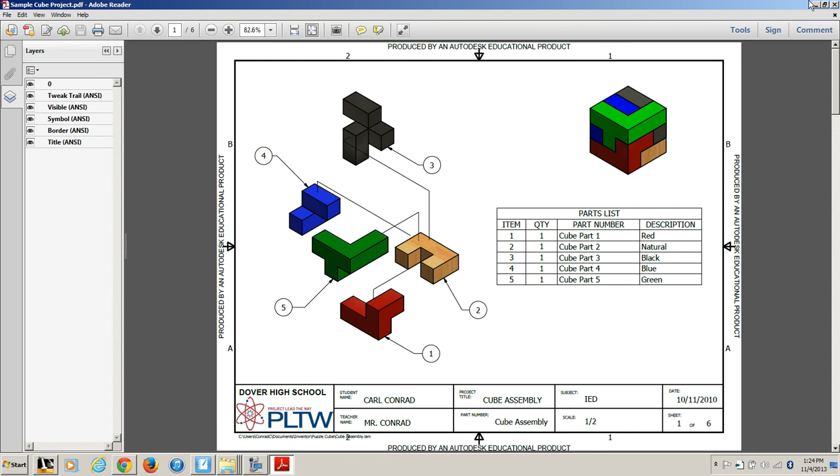In order to do that, we don't want 6 separate files for each drawing. If I click on my Place Views tab, there's an option up here. See, right over here we see sheet number 1. We want to not do different files but insert a new sheet. So I'll go ahead and put my dates in there. And your regular puzzle cube parts, they can all be 1-to-1 scale. Okay, so that's what we'll set up to do, is all 1-to-1.

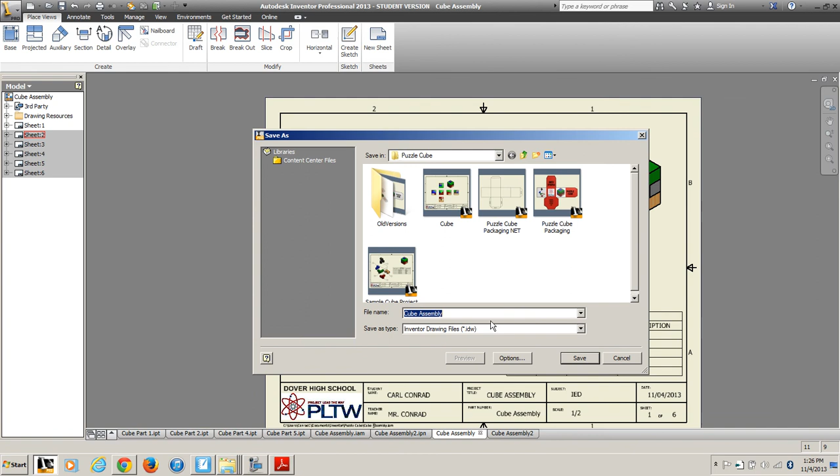And see, there's sheet 2, and we could just keep going. Go ahead and do all 6 sheets. Put the date in. 1-to-1 scale for all 6 sheets. Okay, now you can see I've paused the recording for a moment, but I have all 6 sheets. If I double click on a sheet, I can go back, and the sheet that's not grayed out is the one that's active that I'm looking at. But all those are in one file, and of course it'd be a good time to save this file.

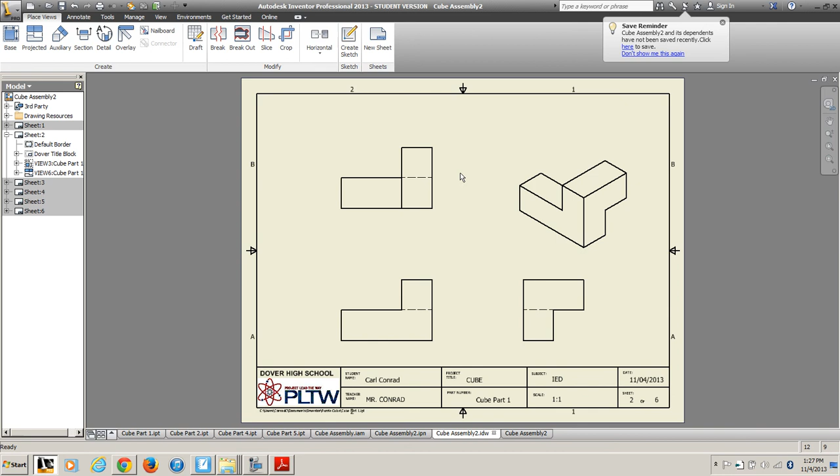Okay, let's go ahead and go to sheet 2. Now what you want to do is bring in all your views, and it's important that you have the correct view chosen for your front view. Now when I select base view, and let's say I pick part number 1, and we want to do all these 1-to-1 scale, so I made my scale bigger. I don't think that's a very good view for my front, and you'll see why. My front view ends up having a hidden line. Okay, so that wasn't exactly visible at first, but once it's created, it was. So let's go ahead and take all those out.

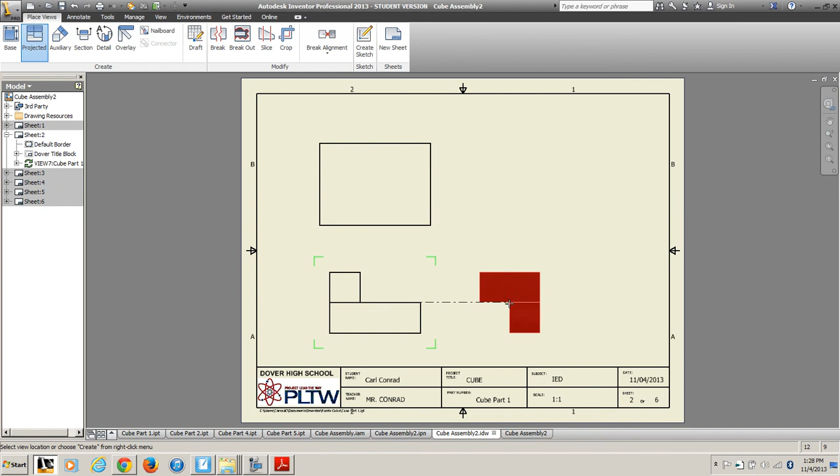So what you want to make sure, in this case it looks like the back view of part number 1 would be a good view to dimension. And notice as soon as you bring in the front view, it changes up here from bringing in a base view to bringing projected. Now we just had to escape and get out of that when we were doing our isometrics, but now we want to project those right angle. And so there's the top, there's the right, and there's the isometric. Okay, so your front view, if possible, should not have hidden lines. You are probably going to have some views that will have hidden lines, and once in a while there's a part that will have a hidden line, but you want to avoid it if possible.

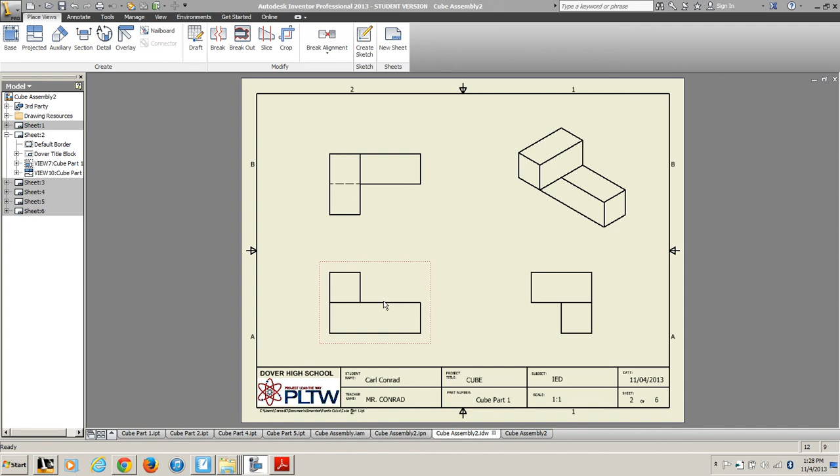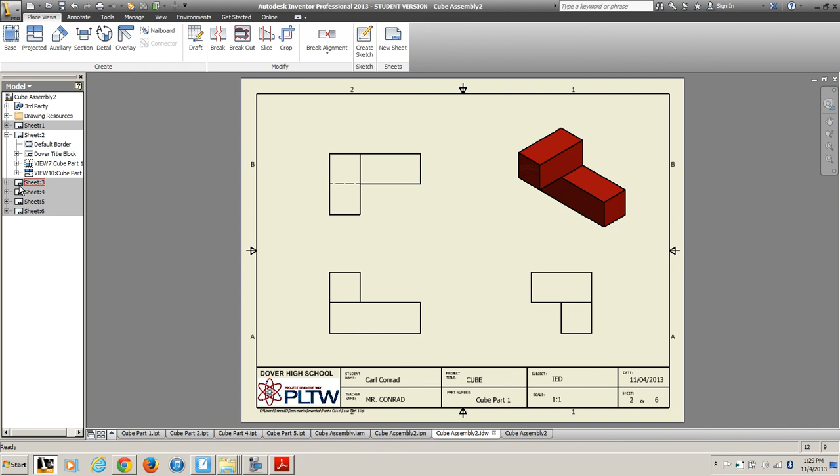So the other thing is, we don't want these dimension drawings to be in color, but we may want our isometric to be in color. So I'm going to select Edit View, and then we'll go ahead and shade that one. Okay, so that'll be in color. Now before you start putting dimensions on, it's a good idea to make sure that you have all your base views correct and your projected views. Let's go to sheet 3 again. Let me show that again.

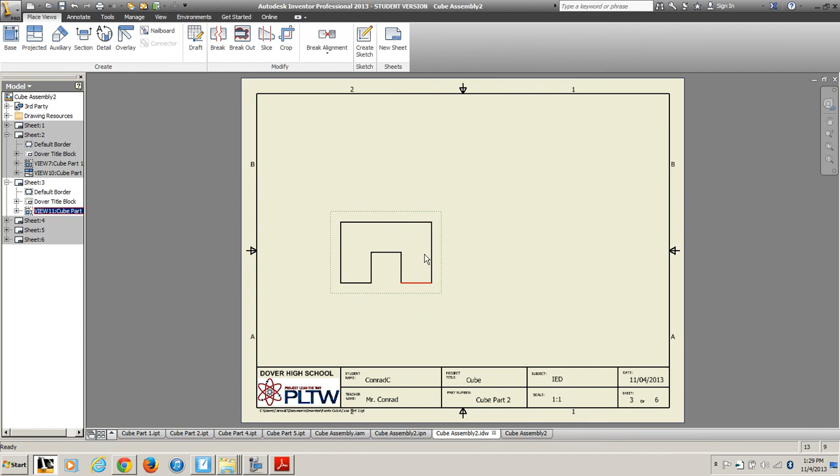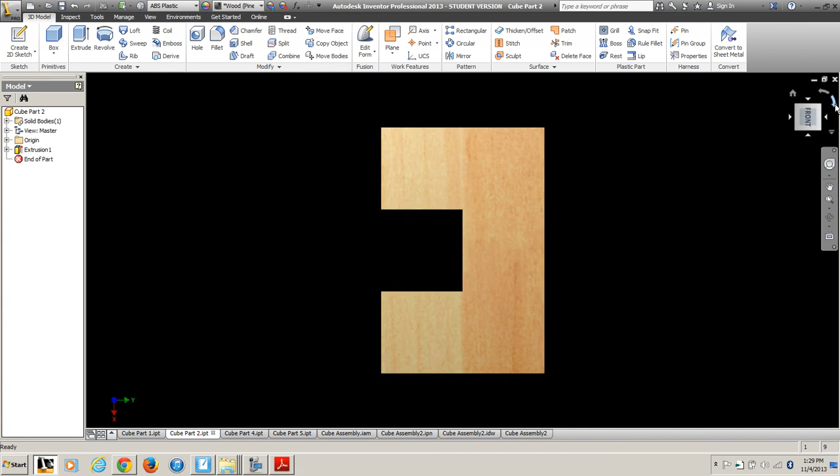A base view, let's go to part 2. Okay, and even this view is okay for the front, but it's not the best. When I go to dimension, my dimensions are going to need to come off the bottom of the drawing. So let me take that out. I just deleted that view. And let me go to cube part 2. What you can do, if you need to fix it, let me click on my cube. I want to dimension this. I do want that view to be the front, but I want to rotate it around. So what I'm going to do is I'm going to save that, and then I'm going to go back to my drawing sheet.

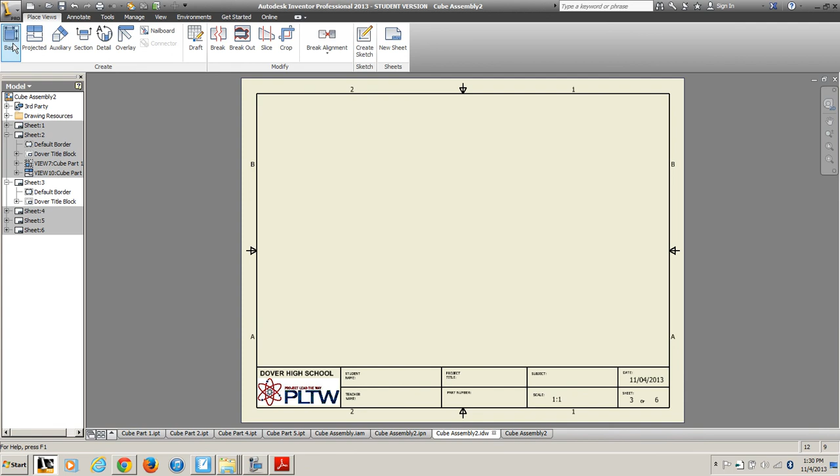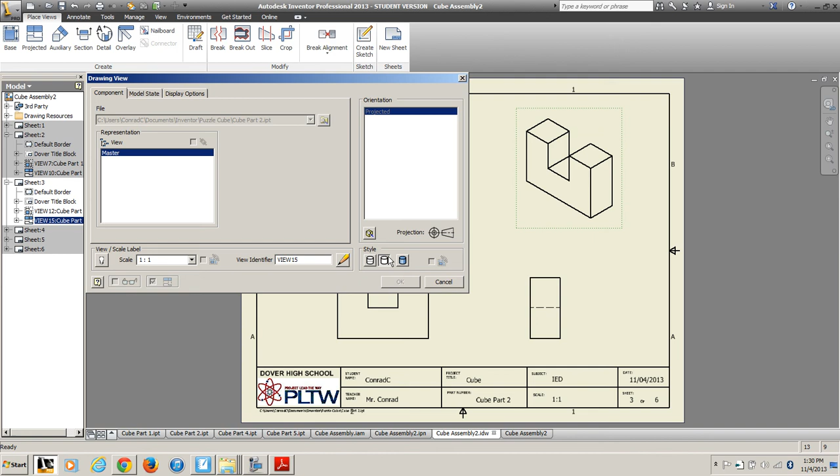Okay, and then bring in base, and notice there's an option that is current view. So whatever way that file is open or saved, that's the view I want to use for that. And of course, we'll create all those views. Again, edit, let's make that view in color. Okay, and again, these should be projected. As you notice, as I move the top view around, if I need to reposition, it's connected to the front view, and the right view is connected to the front view also. So you're bringing in your top, front, right, but again, it is very important that your views are correct. If your views are not correct, then if you have dimensioning mistakes to fix, you will have to start over on bringing in the views.